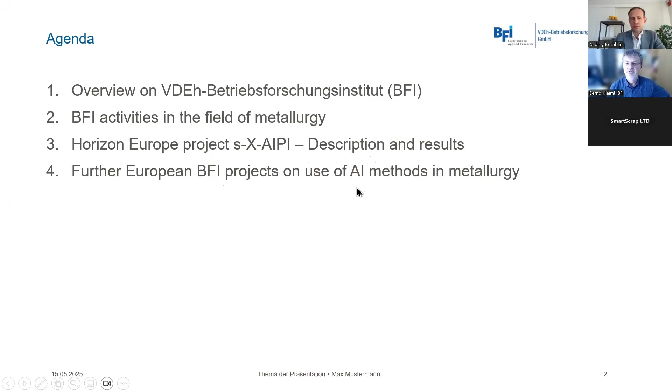So, well, first of all, a short presentation of BFI. We are an Institute for Applied Research, and we are focusing on four topics which are very relevant for the steelmaking industry: CO2 reduction and energy efficiency, digitization and process measurement, circular economy, which of course tackles all the steel scrap topics, and process optimization.

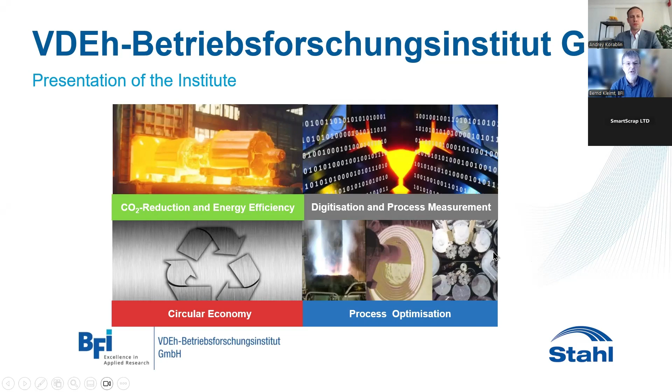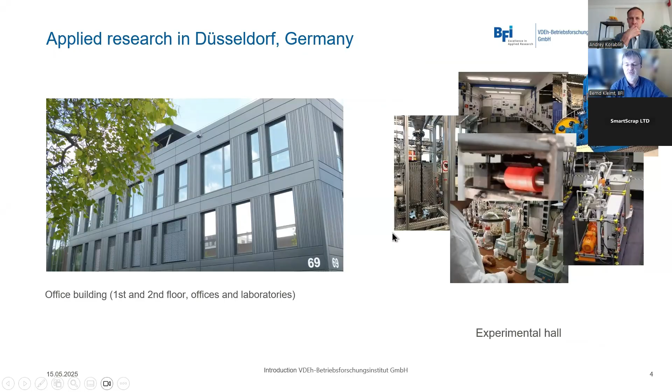Our institute is located in Düsseldorf, Germany, and besides an office building, we have an experimental hall where we can perform pilot plant trials, and a big laboratory for chemical investigations regarding water treatment. BFI is a non-profit institute for innovation with a focus on applied research and development. So we are a private institute, not a university.

We perform innovation as well as short and medium-term research work, always driven by the demands of the industry. Our key areas are the plants, the processes, and also holistic systems. We are not performing any material science, and we are embedded in a large national and international network with other research institutes, but also with our industrial partners. We are performing bilateral research, that means for only one industrial partner, but the most important part of our work is funded research projects on an international basis with other partners in Europe.

Then we have some services like measurement campaigns and industrial projects and licensing of patents. We have approximately 100 employees, 70% of them are academics and postdocs.

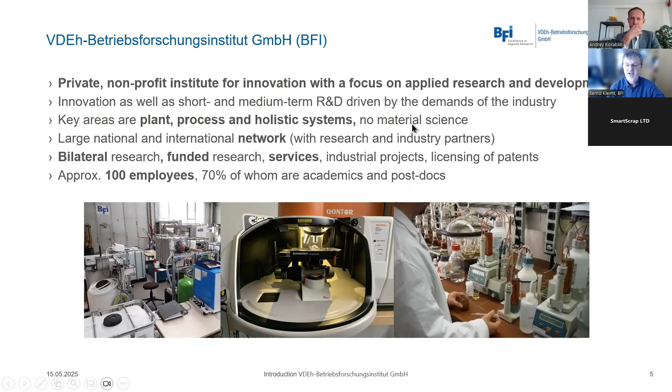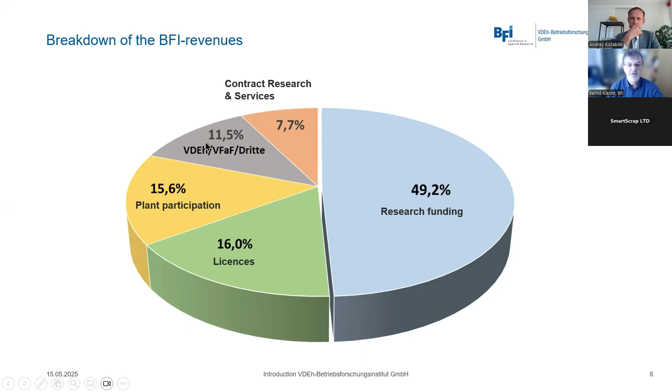You can see the breakdown of the BFI revenues, which gives a clear view on the focus of our work, which is clearly on research projects. We receive around 50% of our budget by research funding. But on the other hand, we have also a strong participation of the industry in these projects, by direct plant participation or by contract research and services. And then we have some basic funding from our mother, the VDEh, and some license income.

So we are also embedded, as I said, in a European steel research network. All over Europe, you will find research institutes which are focusing on metallurgy and process optimization. With all of them, we are performing joint research projects and have a very intensive contact. Besides that, we are in contact with universities in Germany, which are dealing with computer science, process management, mechatronics, metallurgy, and so on.

So regarding our 4 fields of activities, I would like to show you for each of them only a brief snapshot of what we are doing in these fields. This is only very quickly to give you an overview.

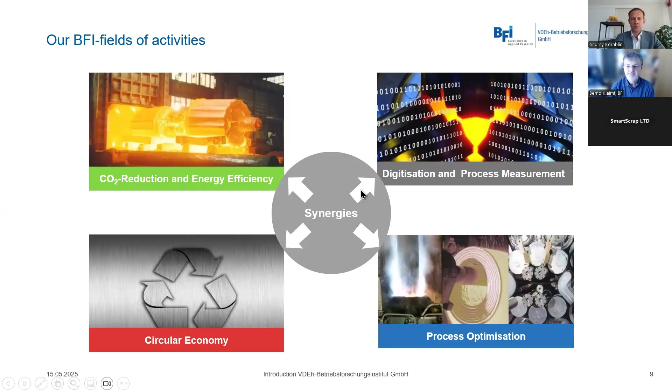Regarding process optimization, we are performing our work with physical models. This can be water models or even pilot plant installations. We have a strong focus on CFD simulation and other process analysis methods. We are dealing with corrosion protection issues, with texture optimization. We have a big experimental hall where we can perform reduction experiments, and we are developing assistive and decision support systems based on software solutions which are developed by our own.

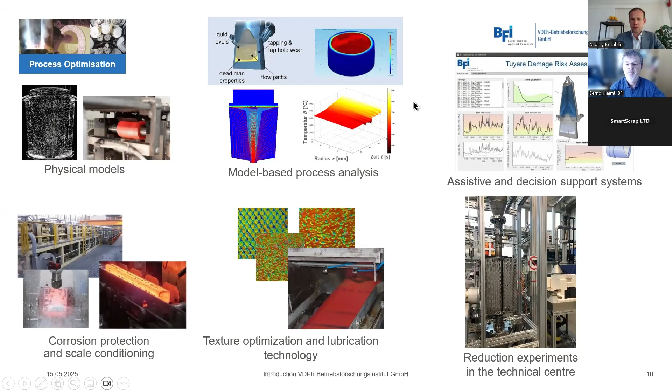Regarding decarbonization and energy efficiency, we are developing systems for heat recovery, optimization of industrial furnaces, metrological recording of energy mass balances, waste heat utilization, and also hybrid heating systems of thermal processes. Please excuse the short disturbance here.

So the main focus is on burner systems. For example, we have a system where we can optimize the burner operation, which is used in electrical furnaces, for example, but also in reheating furnaces.

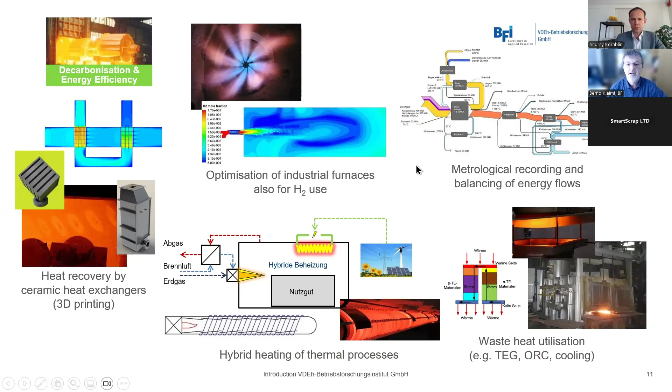Coming to digitalization and measurement technologies, here I will focus on the measurement systems which we are developing. We have a strong focus on optical measurements, for example, optical fibers for temperature measurement. We have different measurement technologies for blast furnace optimization, particle concentration in fluids, and non-contact diameter measurement, as well as a flatness and temperature measurement system developed by BFI.

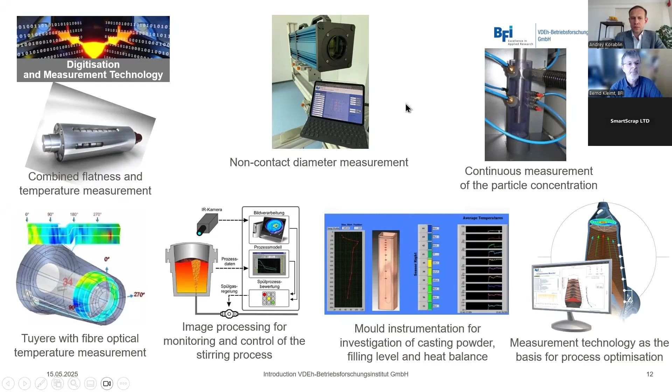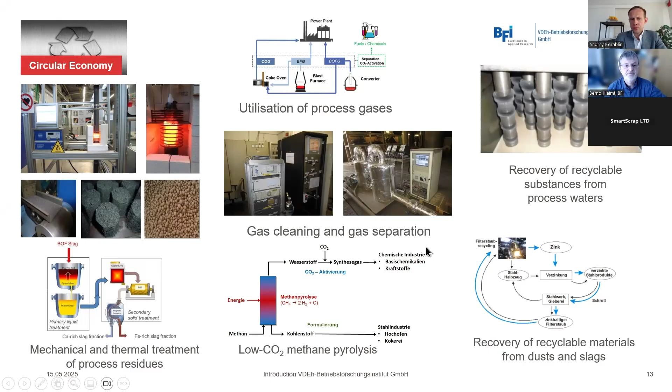So we are organized in 7 technological and scientific departments, and I will now focus on the Department of Measurement and Automation Steelmaking, where I am responsible.

In this department, we are developing especially measurement technologies for process monitoring and control. We have developed, for example, a fiber-based measurement system for continuous measurement of the melt temperature in the liquid melt, a vibrometer system for determining, for example, the liquid core position in continuous casting, and fiber-based mold temperature measurements in the continuous casting plant. We also have a very strong focus on camera-based systems, as you can see on the right-hand side.

One important part is the characterization of steel scrap by means of hyperspectral camera systems, where we can detect different types of steel scrap, and we can also detect pieces of copper or other disturbing elements in the scrap.

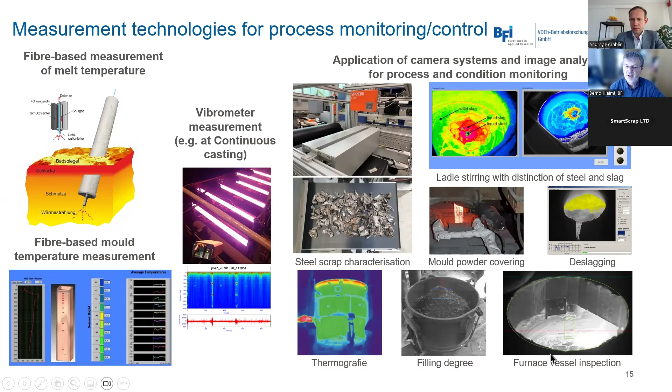Then we are focusing on the monitoring of the stirring process in liquid steel treatment in the ladle, mold cover powder covering in the continuous casting plant, and also furnace vessel inspections for filling degree detection.

So this is the measurement part, and now I come to the monitoring and process control part by means of dynamic process models. We have developed dynamic process models for online control for all liquid steelmaking processes, also for the electric arc furnace. We use these process models also for monitoring and control of the complete process chain, as you can see here in the lower part of this figure.

We combine the process models with the measurement technologies, for example here the monitoring of the liquid bath surface in vacuum degassing in combination with the process model for degassing. And we are performing process analysis with statistical and AI methods.

And now leading to the next topic, which I will focus on further, we have developed a system for scrap characterization and cost optimal calculation of charge mix.

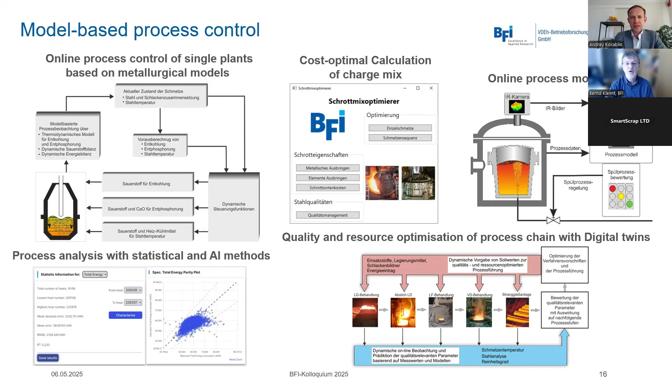So now I will focus on the research project s-X-AIPI, which we have recently finished. The full title is called Artificial Intelligence Technologies for European Process Industry Digital Transformation. Inside this project, we had a use case, the steelmaking use case, which has been performed at the electric steelmaking plant of Sidenor in Spain.

I will structure my presentation around the problem definition. Then I will talk about the characterization of steel scrap with statistical methods, and how we extended this by AI-driven methods. All these tools were then integrated into a comprehensive supervision and decision support system. Finally, I will give an outlook to other similar research projects currently running in our institute.

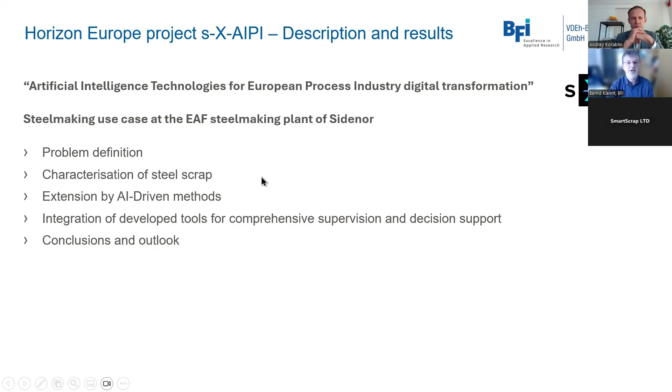First of all, the steelmaking process route at Sidenor in Spain. Here the steel is produced completely from scrap, which is sorted at a scrapyard and then charged into the electric arc furnace. They have a very sophisticated secondary metallurgy treatment with 2 ladle furnaces and 1 vacuum degassing plant, and 2 different continuous casting plants for blooms and billets, and 5 different rolling mills in different plants in the northern part of Spain.

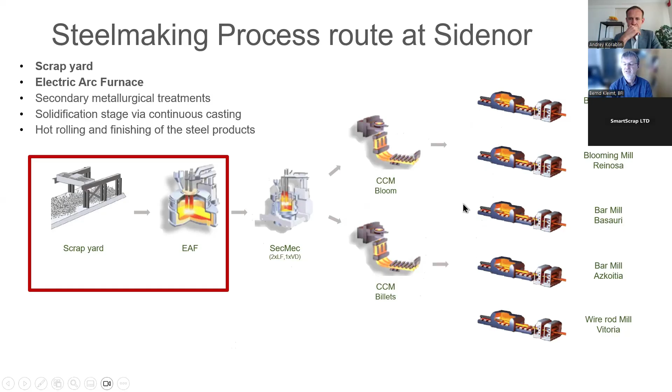The demand in this plant is clearly to characterize the steel scrap used in the electric arc furnace. This steel scrap can be characterized by a high variation regarding the metallic yield, the chemical composition, and the melting behavior of the different scrap types. Furthermore, for oxidizable elements like phosphorus, chromium, or manganese, the effective element yield strongly depends on the furnace operating patterns. So the scrap properties are essential to be considered in context with the scrap mix optimization, but also regarding online monitoring and control of the electric arc furnace process, as the scrap itself strongly influences the melting behavior and the energetic and metallurgical performance of the electric arc furnace process.

At Sidenor, steel scrap from 3 different origins is used. The first one is the most critical: the post-consumer scrap. This is scrap collected from scrapped cars or scrapped household systems and so on. This scrap is very difficult to characterize, and its composition is only roughly known and has high variability.

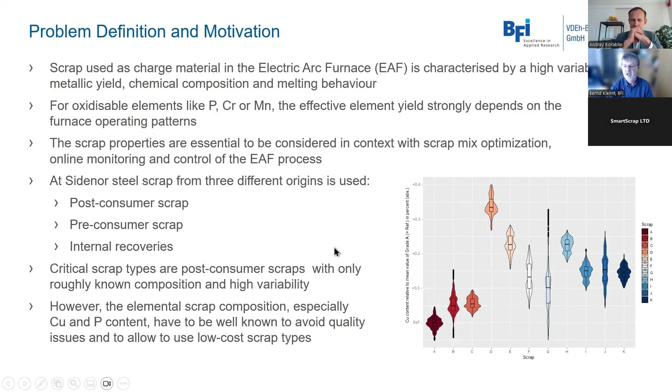Characterization of steel scrap: here we have developed a web-based tool which allows us to characterize the properties of the different scrap types used, and provide this information for scrap mix optimization as well as model-based monitoring and control of the electric arc furnace. This web-based tool allows a comfortable assessment of the different scrap properties, the metallic yield, the element composition, and the specific meltdown energy requirement.

With the database access, we can retrieve the data of the used scrap types, the achieved meltdown analysis, the tap weight, and the energy consumption for each produced heat. Out of this data, we apply a multilinear regression calculation, which determines the properties of the scrap types with mean value, but also with standard deviation and R-square value, to have an indication of the reliability of the statistical determination of the scrap properties.

The accuracy of the characterization is then visualized by a graph, where we plot the predicted versus the measured target values. Here you see an example for the electrical energy consumption. You see that the error of this prediction is quite small, and also the reliability is rather high. Of course, you always have some outliers here at the edges of this scattering of dots for the different heats, but in the end, the result is quite reliable.

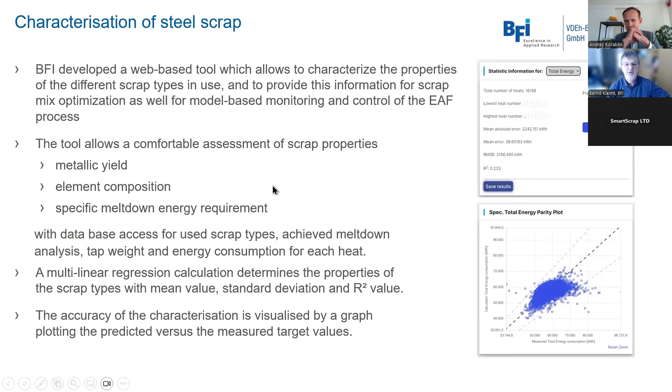So we can use this system also to assess the evolution of the different scrap types over time. For example, we can see that for certain scrap types, the copper content is decreasing or increasing, which depends on the different suppliers of the same scrap types. The quality is, of course, not equal for each scrap supplier, and with this method you can detect all the differences between different scrap suppliers. We also use scatter plots and box plots to see how the properties of the different scrap types scatter regarding the different element composition.

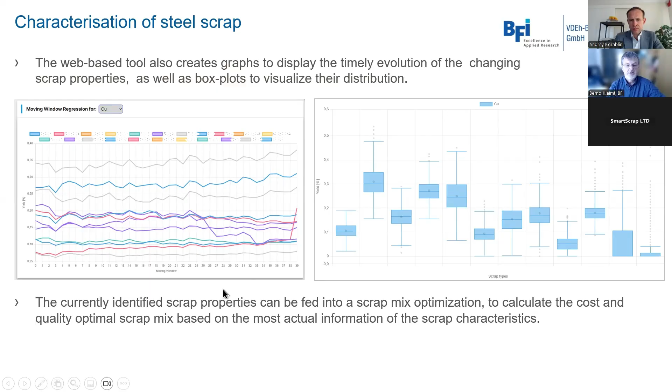So what we found in our investigations is that this multilinear regression calculation provides accurate values for those elements which are more noble than iron, for example copper, tin, nickel, and molybdenum. For these elements, the correlation between predicted and analyzed concentration in liquid steel is very good. But for those elements which are reacting with oxygen, like phosphorus, manganese, and chromium, this correlation is much weaker.

That means that the values for the scrap composition determined by the multilinear regression are not really reliable, and this means that a consideration of further process data is required. You can see here that you don't have a very good correlation between calculated and measured phosphorus concentration when using the multilinear regression calculation, which makes it difficult to achieve the limit values for phosphorus in the liquid steel.

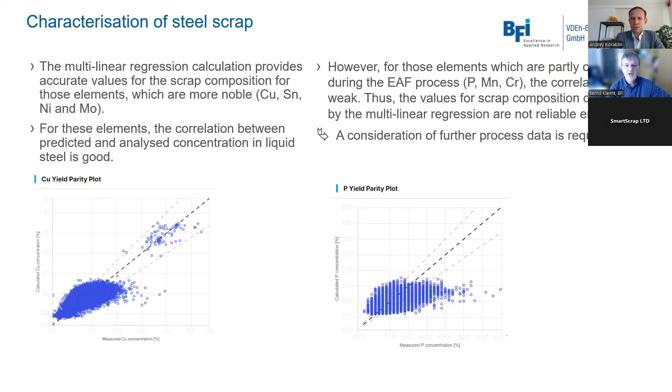So of course you can assess the phosphorus content in liquid steel by means of a dynamic process model, which we also have developed. This model allows us to monitor and predict the process behavior regarding all the important values of the heat status, like the melt temperature and the composition of steel and also of the slag.

The model uses an energy and mass balance calculation in combination with thermodynamic calculations for the elements which are reacting with oxygen and which are not so easy to determine. For example, for dephosphorisation, we have used the mass transfer limited approach with an equilibrium correlation to describe the phosphorus distribution between steel and slag, which is an important parameter for dephosphorisation.

In this highly nonlinear approach, we also have to consider the effect of lime additions and oxygen injection on the dephosphorisation kinetics and the equilibrium conditions.

You can see here that in the steel phase, as well as in the slag phase, the model allows us to calculate the phosphorus concentration at the end of the EAF treatment with very good accuracy. This can also be used for monitoring the process behavior, but also to determine the endpoint of the process when the target values of the EAF process have been achieved and the melt can be tapped.

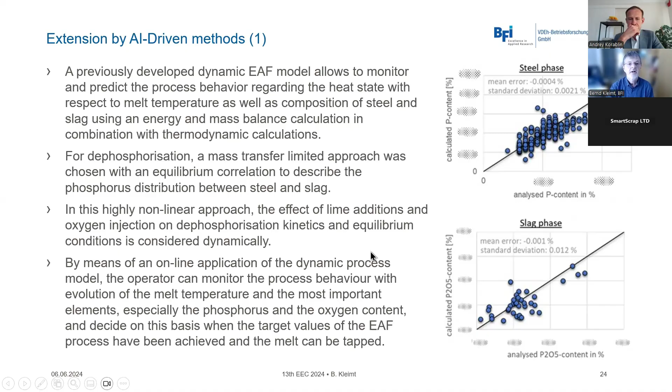But how shall we use this dynamic process model, which is very sophisticated and needs a lot of analytical equations to be solved? How can we use this in a simple scrap characterization? As this is not really possible, we have decided to develop an artificial intelligence model.

So we simply said that we have to consider that the phosphorus content not only depends on the contributions of the different scrap types, but also on the amount of injected oxygen in relation to the injected carbon, the amount of lime addition via the fifth hole, and also, in case it is performed, the amount of injected lime.

So we know that the surplus of injected oxygen creates iron oxide in the slag, which promotes, in combination with the lime additions, the dephosphorisation reaction.

You can see here in this simple table regarding the results of different modeling approaches that when using not only the scrap data, but also in addition the parameters of the EAF treatment, like oxygen input and lime input, you can achieve a much better result regarding reliability of the prediction of the phosphorus content. Finally, we used the random forest regressor, which achieved the highest R-square value and the lowest mean absolute error.

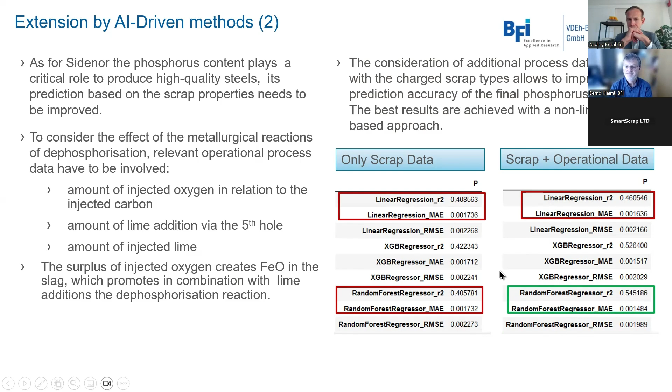So then we have a prediction of the phosphorus content by means of this AI-based model. We can compare the calculated value to the measured one, and we can see that now the accuracy has improved a lot compared to the multilinear regression model.

We can now use this AI-based model to predict the phosphorus content at the end of the treatment for each heat. You can see here a comparison between the measured values in blue and the calculated values in orange, and you can see that there is a very good correspondence for most of the heats. But we also see that there are some higher deviations for some heats, which could indicate that the properties of the scrap types in use have changed.

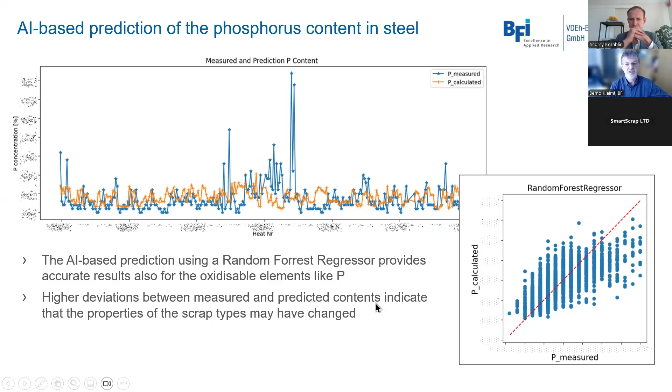When we do this comparison more systematically, and in case we find that this deviation between measured and predicted element content is higher than the predefined threshold for several heats in a row, which is indicated, for example, here, where we have several heats in a row with a much higher deviation than the average, then we use a so-called autonomic manager, which is also an artificial intelligence tool, to create an alarm that anomalies in the scrap type properties have been detected.

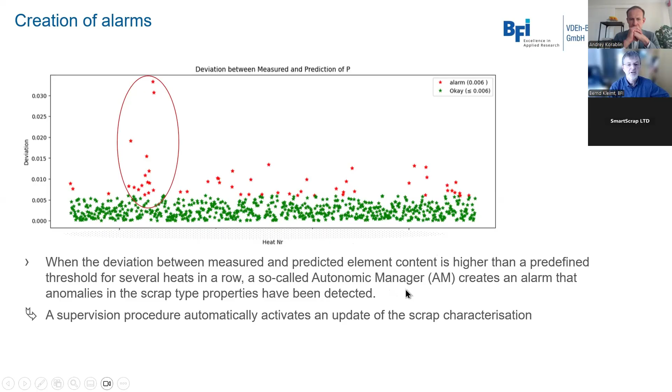A supervision procedure automatically activates an update of the scrap characterization to determine new values for the phosphorus content in the different steel scraps. You can see this procedure here in this scheme.

Let me explain it from the top. We have the AI-based process model, which uses the scrap mix charged for every heat, and other process data like oxygen input, lime input, and so on, to predict the element concentration. Then this predicted value is compared to the measured concentration, determined by laboratory analysis.

If the difference between predicted and measured concentration is higher than a threshold, an alarm is created from the autonomic manager, which says something is wrong. We assume that the composition of the charged scrap mix is not as expected, and this means that we need to recalculate the composition of the different scrap types.

This is then done automatically. A new scrap characterization is performed. We achieve new results for the phosphorus or copper concentration of the different scrap types, and an expert decides to accept or decline these results.

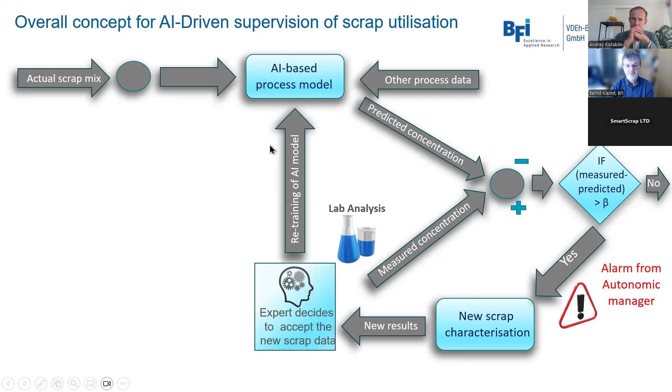If he accepts the results on the new scrap data and decides the result is reasonable, this will cause, on one hand, a retraining of the artificial intelligence model, because the parameters of the AI model are based on the properties of the scrap types. At the same time, we have to renew the calculation of the scrap mix optimization, which will calculate a different scrap mix optimal for the condition of the changed scrap type composition.

So this new result of the scrap mix optimization is then provided to the operator. He decides to use these values and apply them for the next heat to be produced, so that for the next heats, the difference between expected concentration and actual concentration is below the threshold.

As I said, we use scrap mix optimization. This is a simple simplex algorithm, although it's not as simple as it sounds, because you have to consider lots of restrictions, in the first place the elemental composition of the steel grade to be produced, but also further restrictions like loading restrictions, that for a certain scrap type not more than 20 tons can be charged or something like that.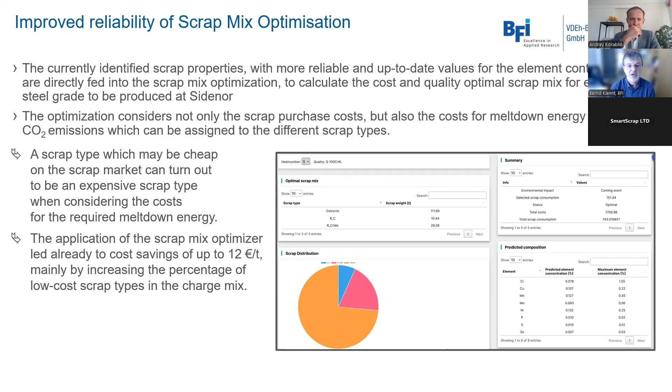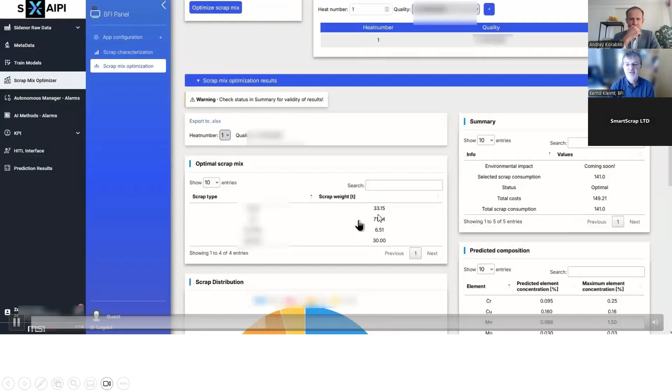This is a very short video to show how the scrap mix optimization works. I will just let it run. You select the quality which has to be produced, start optimizing the scrap mix, then you will receive the result, the different amounts of scrap to be charged for the different scrap types in use.

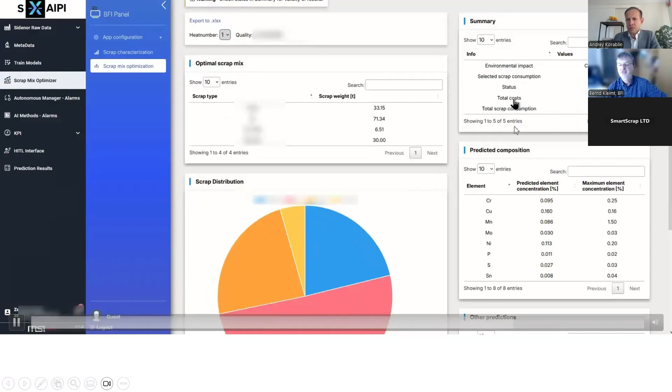On the right-hand side, you will see the result, the total costs, the predicted element concentration, and also further information, how much oxygen has to be used, how much lime, and so on.

Some words about benefits, cost savings. I already said some trials at Sidenor led to savings up to 12 euro per ton, which is of course a very high value. We did the same investigation for a lot of different steel grades you can see here, and the relative cost savings are quite positive for all the steel grades.

Only for one steel grade, the scrap mix patterns which were originally used achieved a slightly lower cost. But for most of the steel grades, this scrap mix optimization achieves more cost-efficient results.

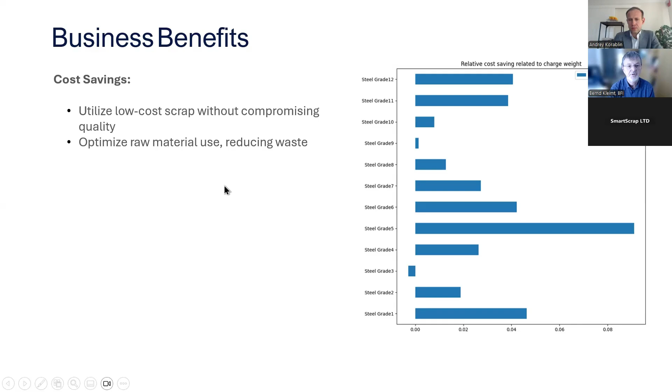Next is the quality improvement. What we found is when applying the system, we have fewer defects with non-conformities, for example for the copper content. You see here the application of the system, and we followed it for several weeks and found that the number of non-conformities decreased during the application of the system. In the end, we had an improvement of around 6%.

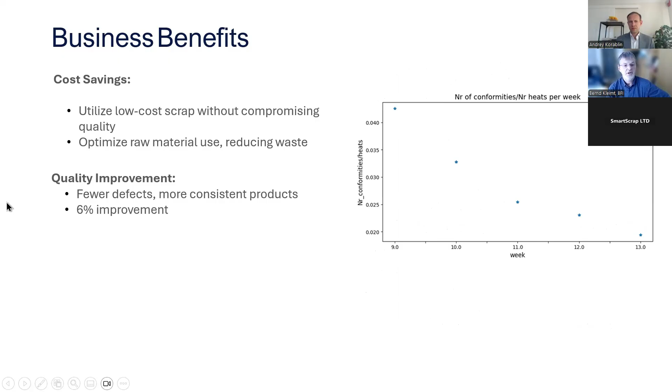And finally, the operational efficiency. The AI-driven insights enable faster and better decisions for the operators and reduce the reliance on manual experience, with improved analysis of the scrap types.

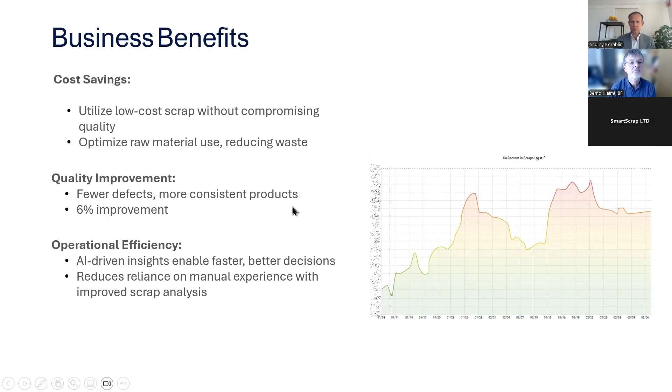Yes, I want to finish my presentation with the conclusions. Statistical models for scrap characterization provide reliable and up-to-date information on the properties of the scrap types in use. The resulting data are directly fed into a scrap mix optimization for decision support and control of the scrap mix to be charged.

As the properties of the scrap types in use vary with EAF operating conditions and also the scrap suppliers, monitoring of the deviations is required, and also an appropriate short-term reaction if significant deviations occur.

For that purpose, we have developed a comprehensive AI-based supervision and decision support system, which can detect anomalies in process and model performance caused by variations in the scrap properties, and we apply detection, diagnosis, and self-repair modules, which I already explained. These support the operators and engineers to ensure optimal performance of the EAF charge mix control tools.

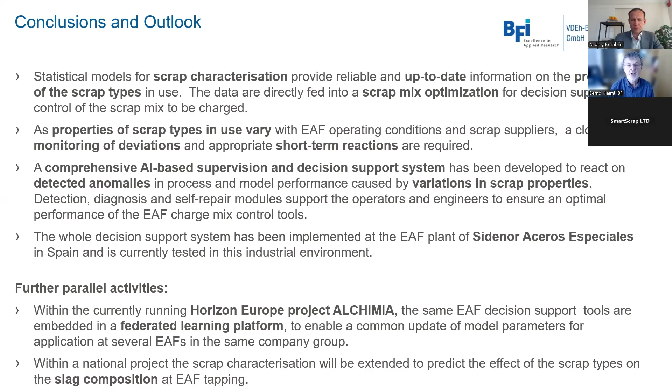Yes, this is my last slide, and I thank you for your attention. I also thank, of course, the European Union for funding the research projects which we are currently performing, all around scrap usage and process optimization. Thank you very much for your attention. I'm happy to answer any questions you might have regarding my presentation.

Thanks, Mr. Kleimt, for a very useful and interesting presentation. You mentioned 12 euros per ton as the economic effect of the optimization. Is there any room for improvement? Is it just the beginning, or do you feel it's already done, or is there still room for improvement?

I think there is still room for improvement, because, as I said, we want to also handle the effect of scrap use on the slag, and also what has not been investigated so far: which savings can be achieved when optimizing not only the scrap selection, but also the meltdown process in the electric furnace. Having better information on the scrap composition, we can probably also control the electric arc furnace process better, with the energy and material inputs, so that at the end you will also have some cost savings for energy input and for material input like slag formers or carbon input.